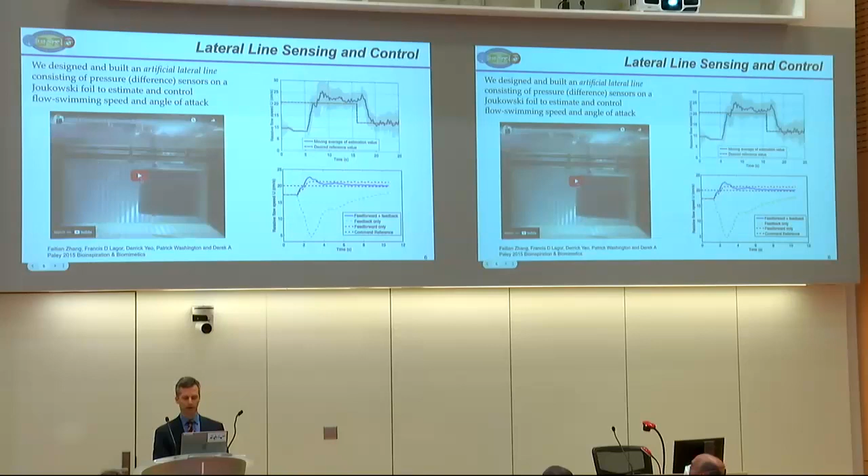And so this robot was actually able to maintain its position in the tank despite being suspended from a set of frictionless air bearings that would otherwise allow the drag force to push it downstream. And so this was the first instance of a bio-inspired feedback controller for an underwater robot.

Then we got a little bit more advanced, and we sought to replicate a behavior that fish exhibit known as Kármán gating. Kármán gating occurs either in the wake of an obstacle, an upstream obstacle, or in the wake of another fish. And it's a tendency that fish have to actually slalom around the series of oncoming vortices.

So here we built a system, and now the air bearings, rather than being aligned with the streamwise direction, are in the cross-stream direction. And the fish to the right is exhibiting the Kármán gating behavior utilizing 4 pressure sensors that it uses to reconstruct the vortex street, as it's called, that's being generated by the flapper on the left.

And it's controlling its angle of attack relative to the flow, which generates a lift force. In this case, the lift is generated perpendicular to the flow direction, so it's able to move back and forth on those air bearings and exhibit this slaloming behavior.

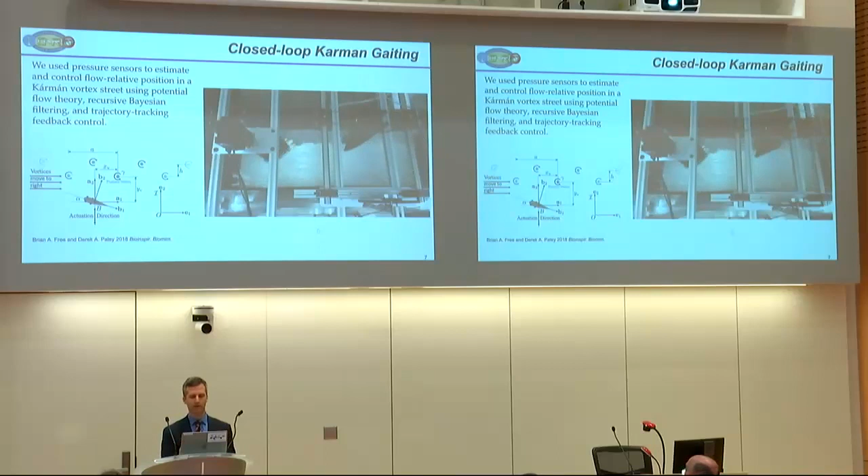And we had an interesting finding in this work, which was that, in fact, to observe or estimate and reconstruct the vortex street, the ideal trajectory to maximize the information you collect is actually to collide with the vortices. But for energy efficiencies, fish actually slalom around them. And so there's an interesting trade-off between energy and information acquisition.

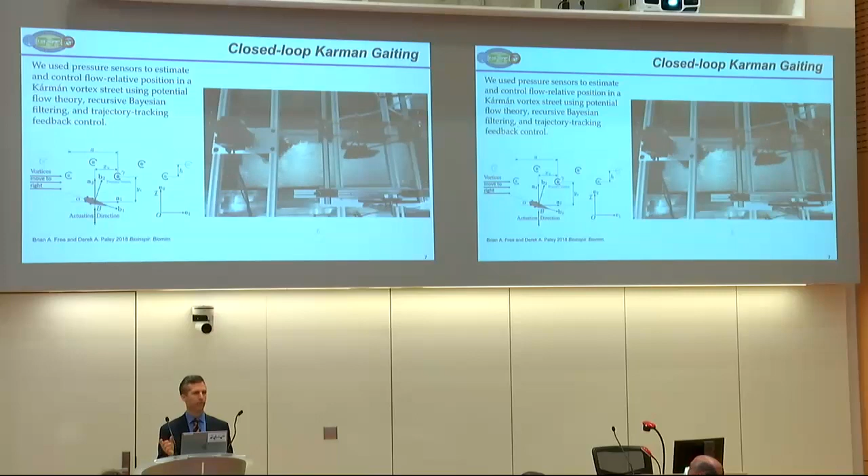So next we actually started to build some free swimming fish. So these fish are untethered, and they have an internal reaction wheel, which is basically a motor with a heavy metal disc attached to it. It's a technology used in aerospace engineering, particularly in satellites. And by rotating that heavy metal disc back and forth, we can generate flapping behavior. So the body of the fish is made of rubber, and it has an internal pressure vessel which contains the motor and the other electronics.

And indeed, what they're doing is they're communicating with one another in order to align their swimming direction, a process that we think of as synchronization. And they're able to do that by using feedback control.

So then we deployed these fish in our neutral buoyancy research facility. So for those not aware, we have the largest underwater research facility on a university campus, and it's 25 feet deep. Here you see it, especially nice blue color, and our school of robotic fish are swimming on the surface or near the surface, exhibiting that synchronization behavior.

And this was a really nice result. In fact, the student who did this graduated on Monday with his PhD in aerospace engineering, Anthony Thompson, and I'm very proud of it.

However, this interaction is based on communication and not sensing, which is to say that the fish have radios on board, and the reason that they're operating near the surface is because those radios don't work underwater, and they're broadcasting their swimming direction, and then performing the closed-loop control that allows them to synchronize their headings. But it's not very bio-inspired because fish don't communicate in that manner. Instead, they passively perceive their environment and their neighbors using sensing, whether it's pressure-based sensing or visual sensing. So that motivated our next and ongoing research.

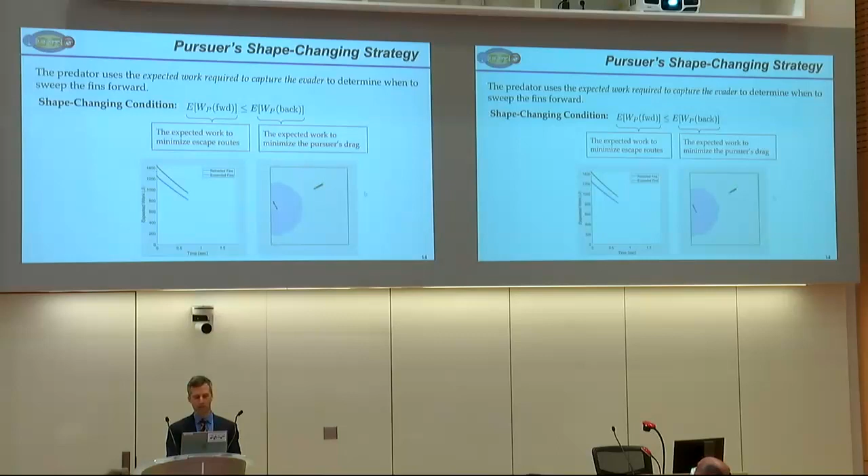And the expected work calculation I'm not showing here because it's rather involved, but it takes into account that the prey fish is exhibiting a stochastic behavior, and therefore we have to use probability theory to calculate the expected work. So we can actually do this analysis over the entire domain, and indeed, in a domain that's not bounded, it's actually optimal for the predator to keep the fins back. But it's only in this bounded domain, like you would find in a coral reef, where there's other structures, that it's advantageous for the predator to sweep the fins forward.

And you can see these orange silhouettes represent the switching boundary. So anywhere inside those orange regions, it's better to have your fins out, and outside, it's better to have the fins back. And so we can look at optimal strategies for pursuit under these assumptions.

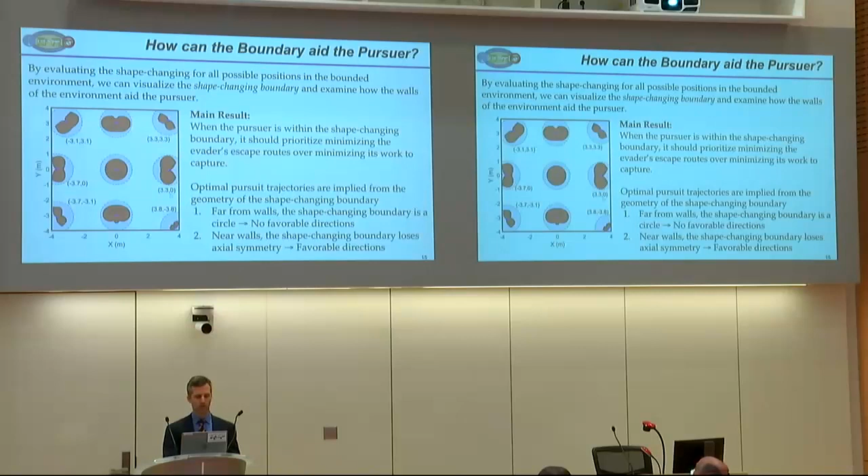Okay, so moving on, I'm going to tell you a little bit about some work by a former MRC postdoc. So Artur Wolek's now on the faculty at UNC Charlotte. And so Artur has been looking at this question of how do we assimilate information from a spatially distributed array of pressure sensors, in particular to reconstruct the relative position and velocity of our neighbor fish.

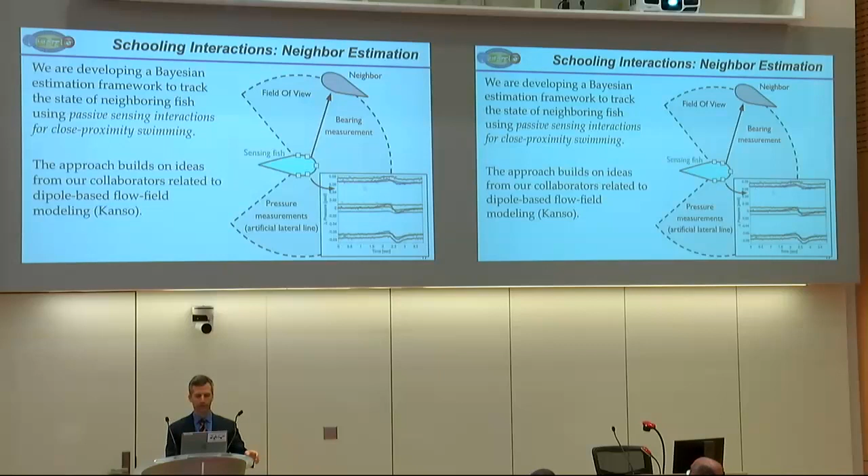And so the assumptions that went into this are that we have an array of sensors shown as these white squares, and each one of those measures a scalar value over time, and those scalar values are shown on the right. In fact, the measurement that we use is the pairwise differences between the absolute pressure measured by each of these sensors, and that way we're independent of the depth of the fish below the surface, and we're independent of any drift that the pressure sensors might exhibit as a function of temperature.

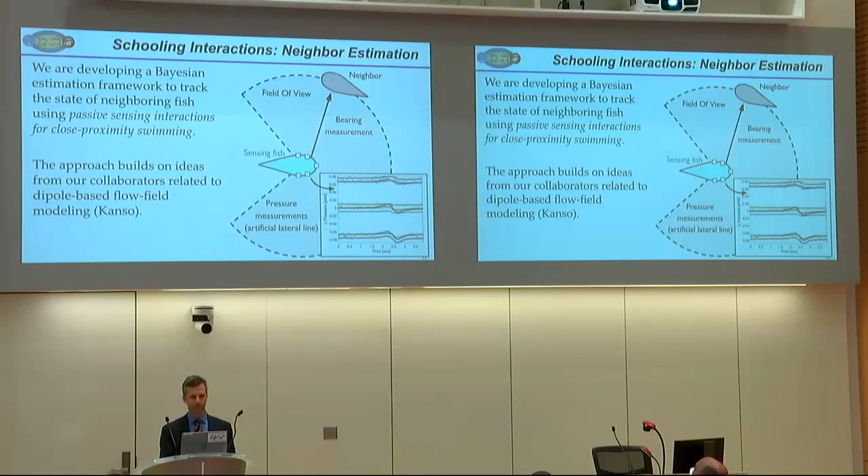So looking at pressure differences, we see that these signals fluctuate depending on the proximity to our neighbors. And so indeed, by invoking a hydrodynamic model known as a dipole model for each of these swimming fish, their motion influences the pressure signal that its neighbors receive, and we can use those fluctuations to reconstruct the position and velocity of each fish in the school. And so here's the architecture, and you see that we invoke a particle filter.

Is this microphone sort of dropping out periodically, or is that just my ears?

Okay, all right. We invoke a Bayesian filter known as a particle filter to reconstruct the states of our neighbors, in particular their orientation relative to us, because that's what we use in our synchronization law that I mentioned a few slides ago, which allows us to steer to align with our neighbors. And so we can use this architecture in what's called an output feedback control, where we're using the output of our sensors to update the estimate, which is used in the control law, and then you iterate.

And so here are some results that were submitted to IROS recently. And you can see the two fish results. So interpreting, here's the particle filter, and you can see how it rapidly converges to the estimate. And the estimation is done in the frame of reference of the focal fish rather than the inertial frame, because that's the reference frame in which each fish perceives the environment.

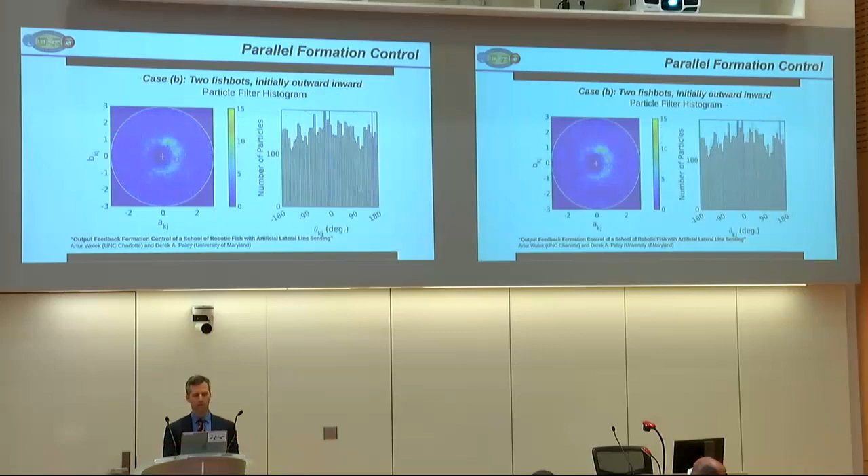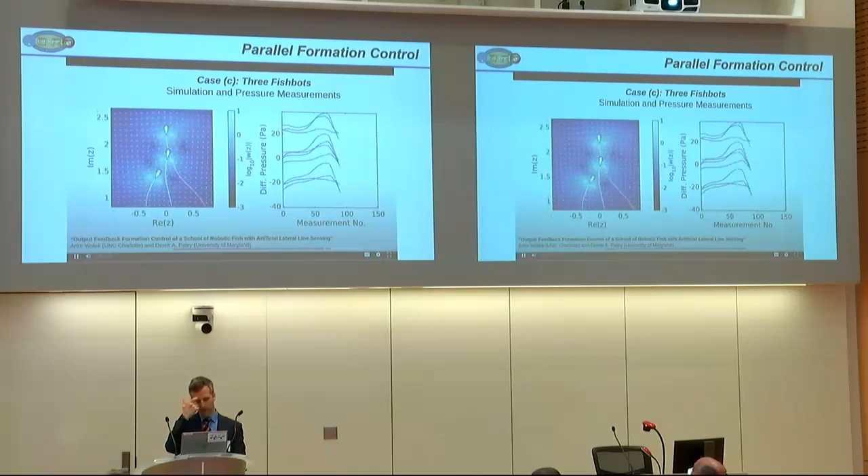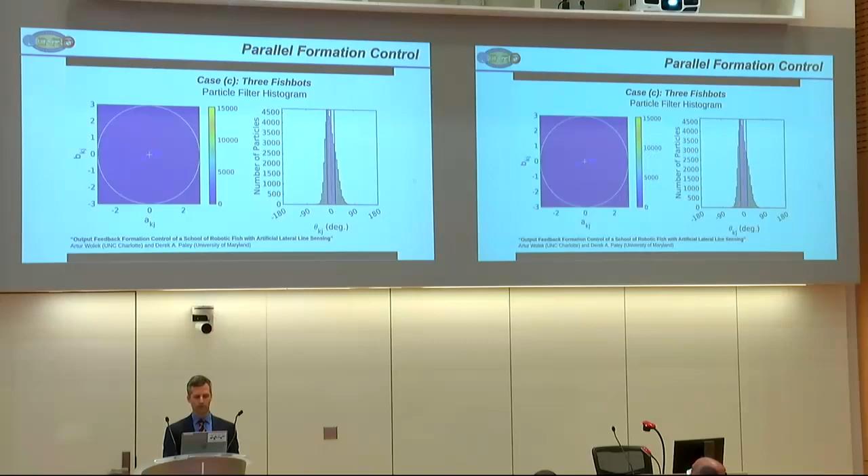So you can see the particle filter works quite well in the two fish case, and as well in the three fish case, although it does become a little bit computationally burdensome because of the number of particles that you need to use. And so, this is ongoing work to look at how to make this efficient enough to implement on board.

So next I'll talk a little bit about hydrodynamic efficiency, which is the theme of the current ONR funding, namely this question of feedback stabilization of vortex position. And this is work done by Rose Gebhardt, who's an aerospace PhD student here, and she's supported by our grant, and will be spending the summer at the Naval Undersea Warfare Center in Rhode Island. So a previous student of mine looked at this question by thinking about it in the complex plane as follows.

So if you look at the animation on the left, basically what you see is a disk exhibiting this surging and heaving motion. And the reason we started with a disk is because there's a transformation of complex variables known as a conformal mapping that allows you to take a disk and map it to a foil shape. And indeed, it's that heaving motion of the disk that corresponds to deformation of the foil. So it's a really natural mathematical environment to study fish behavior and the fluid motion near the fish.

And for that, we invoke a tool known as potential flow. And so in a potential flow model, it's a very low dimensional representation of the fluid, and it allows us to write it down in state space form. And so for any of you who've taken my class, we know that the state space representation is the starting point for the feedback control design.

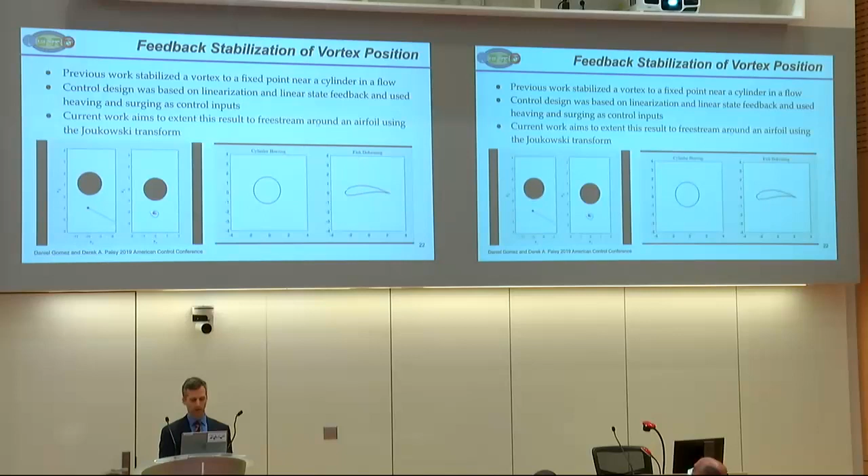And so what my former student Daniel showed is that in the disk plane on the left, he could actually stabilize the position of a vortex near the disk, which you can see both in the inertial frame here and then in the frame of reference of the disk. You see this nice stable spiral, which is indeed, in the open loop case, an unstable equilibrium point. The vortex would not naturally stay there but for the motion of the disk. And so the question that Rose has been addressing is how to extend those results to the foil plane.

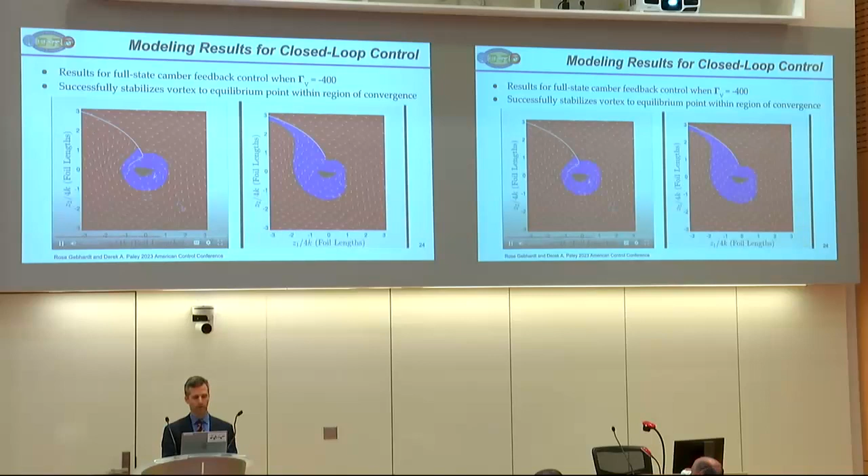But just because a point is an equilibrium point, it doesn't mean that it's stable. And so indeed, these are generally unstable equilibrium points unless we flap the fish by deforming its shape. And so Rose has showed that by deforming its shape, we can stabilize a set of fixed points. Sorry, I misspoke. We can stabilize a set of initial conditions shown in blue there. And so these are closed loop results, which I'll attempt to loop here.

And the blue shows the set of initial conditions for which we can stabilize the fixed point, shown as that white X. And so the animation shows one particular initial condition. But as a matter of fact, if we start anywhere in that blue region, then we can capture a vortex and drive it to a given fixed point by deforming the shape of the fish body.

But the question is, why would we want to do that? And the truth is, we don't. But it's a starting point for the problem that we actually want to solve, which is tracking a particular trajectory. Because what we know is that the forces on the fish depend on the trajectory of vortices as they pass the fish in the fluid. And if we can steer a vortex to a trajectory that conveys advantage to the swimming behavior of the fish, then we've improved the hydrodynamic efficiency.

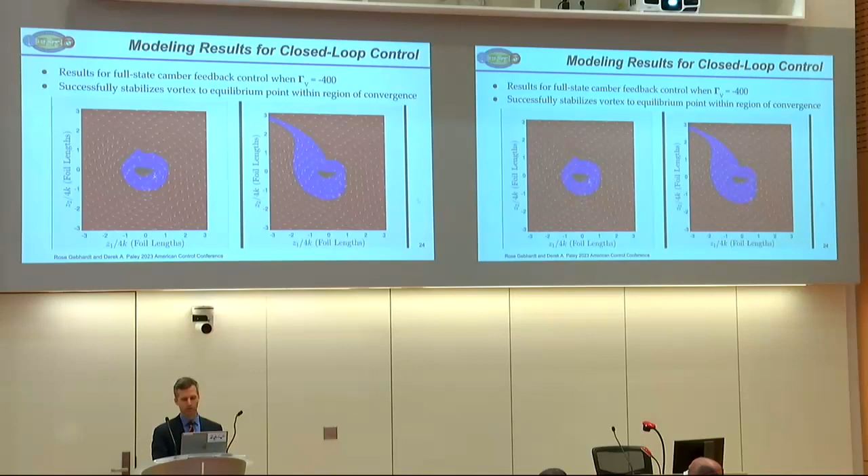So the stabilization problem is sort of a canonical problem in control theory. And if you can solve the stabilization problem, then you can go on and solve the trajectory tracking problem. So that's the problem that we study next. And we formulated the trajectory tracking problem by imagining that the fish is swimming, and therefore its body shape is changing sinusoidally. And the control input shows up as a perturbation of the phase of that open loop signal.

So if we had no control, where phi is the phase variable, then phi would be constant, and the fish would just flap, and it wouldn't change its flapping behavior at all as the vortex passes it by, and you sort of get what you get. But by assigning the control input u to the rate of change of this phase variable, then we can adjust our flapping behavior ever so slightly in order to steer the vortex.

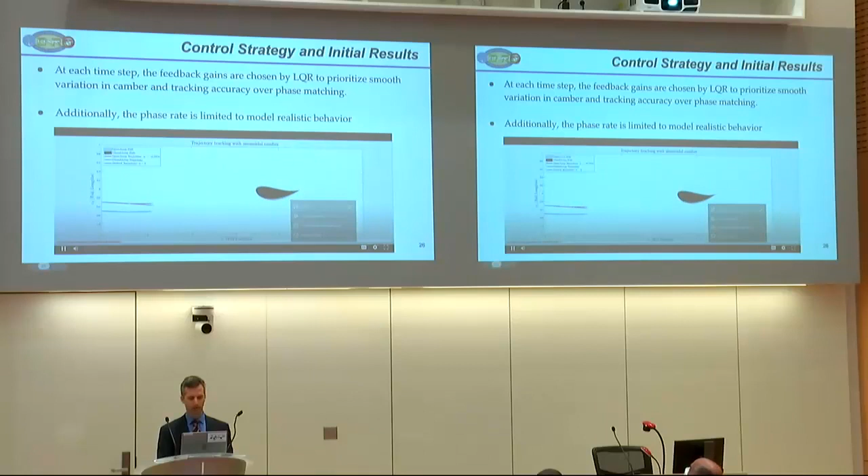And so that's what's shown in this animation, which shows 3 things to draw your attention to. First is the gray silhouette is the open loop fish shape. And you can see the black silhouette, the closed loop fish shape, is very similar. We're only perturbing the swimming behavior ever so slightly, which may be why we don't necessarily observe this in fish, because it doesn't take much to do this.

Then by looking at those 3 colored lines, you can see that we're driving the purple vortex from its default trajectory, which is the red curve, to the desired trajectory, which is the blue curve. And if the blue curve, the desired trajectory, is chosen based on optimization, let's say, of the hydrodynamic efficiency, what we've shown is a strategy that can maximize that performance.

And so in ongoing work, we're looking at which trajectory we would like to actually stabilize. And you can imagine that this is in the context of inline swimming behavior with an upstream fish.

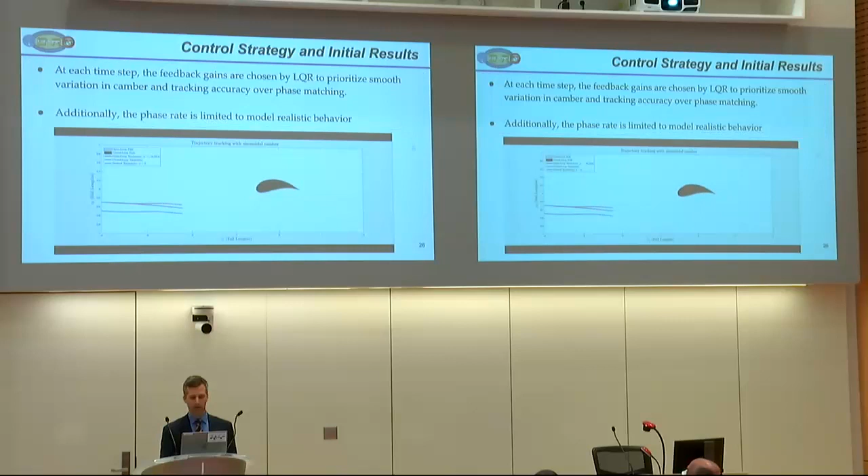All right, so lastly, I'll talk a little bit about our experimental work that's being supported by Wei-Kuo Yen, who's a postdoc that is co-sponsored by the Maryland Robotics Center and the Matrix Lab. Matrix Lab, as some of you may know, is our new facility in Southern Maryland that's housed in the USMSM Smart Building. And Wei-Kuo was assisted by Kruti Bingradia, who is an undergraduate student in aerospace engineering.

So the basic philosophy here, as I've kind of alluded to throughout the talk, is that we seek to combine two sensing modalities in a feedback control loop that can maximize the hydrodynamic efficiency of swimming in close proximity to another fish. And that's kind of a mouthful, but one of the leading hypotheses for this inline swimming behavior is that the follower fish should synchronize its tail beat frequency with the lead fish, but offset the phase of that flapping behavior in proportion to the downstream distance.

And the intuition behind that comes from the fact that vortices, of course, are being advected from left to right due to the oncoming flow, and those vortices reach the follower fish a little bit after they're produced by the upstream fish. And so in a manner of thinking, this is a synchronization phenomenon whereby you would like the downstream fish to flap its tail just at the right time when that vortex arrives. That's what's called in the literature vortex phase matching. And we believe that we can produce vortex phase matching using feedback control.

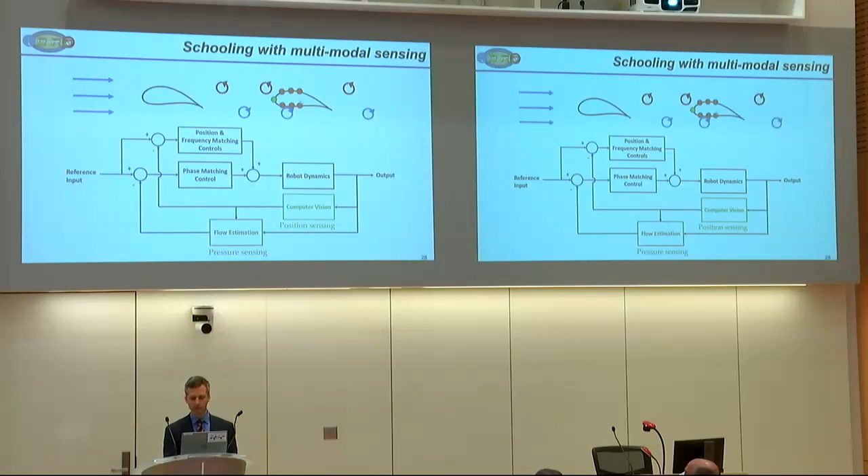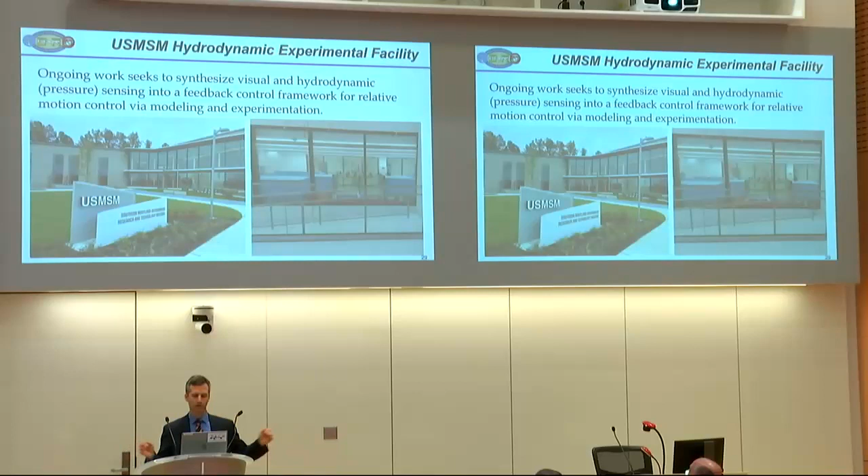And so this control architecture shows a combination of pressure sensing to estimate the flow speed and angle of attack, and visual sensing in order to determine how far away the lead fish is. And so we are in the process of setting up this experiment. Here is the smart building, and there on the right is the hydrodynamics lab. So this is a large water tunnel that was opened just last October, and it has an 80 centimeter by 130 centimeter cross section that's about 2 meters long, so plenty of room for us to put some fish in there. And so Wei-Kuo has been working on that.

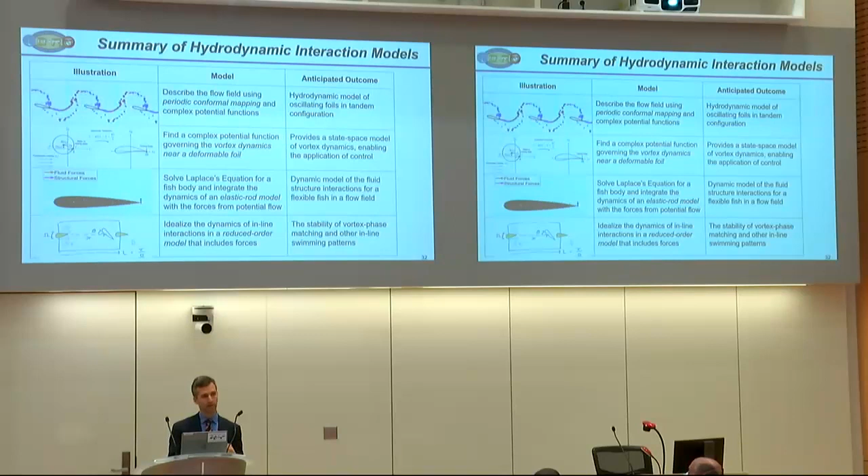And then lastly, at the bottom there, that's just a little cartoon where we actually have made some nice insights about this inline swimming behavior from very, very simple reduced order models that look at basically the thrust-drag balance on the trailing fish and how that's affected by the phase of its flapping motion. So with that, I will stop, and I thank you so much for your attention.